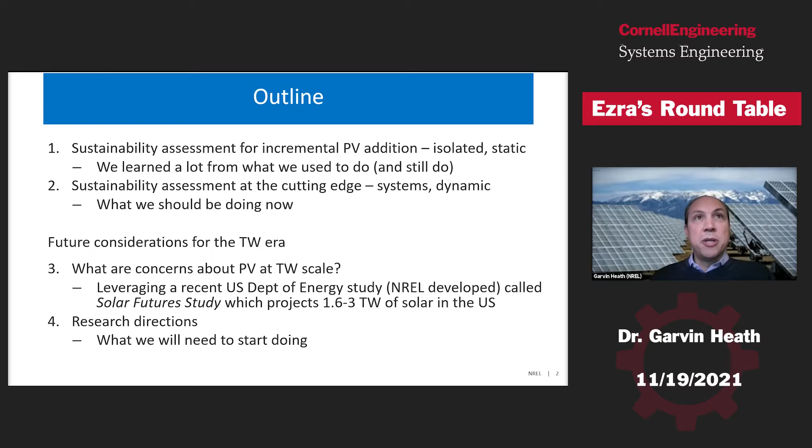But PV is going to expand, and I'm going to show you some highlights from a very recent study that was published by the Department of Energy, but that NREL really led the development of. It's called the Solar Futures Study. And it starts to consider PV at this multi-terawatt scale. And we then can ask other questions, or we should be concerned about some other questions. And we have some early answers to some of those things, but of course they need further study. And then finally, I'll end on some future research directions, what we should be starting to do now so that we can get ahead of some of these questions and answer them.

That was then featured in the IPCC Special Report on Renewables, and became the central focus of a special issue of the Journal of Industrial Ecology and has since been published elsewhere. But we assessed all of these different electricity generation technologies. We systematically reviewed the literature. We have reviewed to date well over 3,000 published life cycle assessments to come to this kind of figure.

And it clearly shows that on this life cycle greenhouse gas emissions, gram CO2 equivalent per kilowatt hour basis, again, sort of that incremental addition of a kilowatt hour, those electricity generation technologies that are powered by renewables, photovoltaics being one of them, have characteristic, so central tendency, life cycle GHG emissions at 50 grams CO2 equivalent or lower. Nuclear is also in that same camp, at least by these published life cycle assessments.

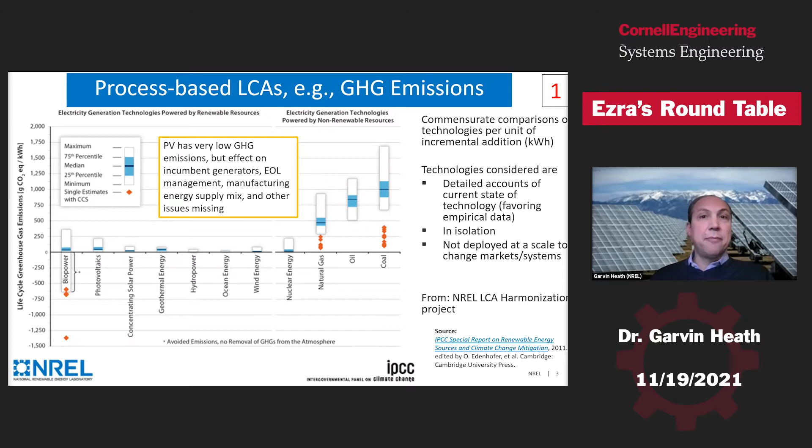End of life management, that's EOL, is typically not considered in these studies. It hadn't been to date. The energy supply mix, and as that changes, is not being considered in these. So there are many separate individual issues that are missing. Greenhouse gas emissions isn't the only thing that process-based life cycle assessments have considered. We also have considered water consumption, certainly a growing interest in the availability of water.

And on a life cycle basis, it does miss the accounting for when and where water is available, because in life cycle assessments, you aggregate over time and space. So it gives you one measure of that total water demand, but really to better understand and situate this water consumption, you need to also understand where and when. So that's another deficiency of this process-based approach. But you can see here that photovoltaics is very small in comparison to many of these other technologies.

We've divided the water use by the phase. So building the power plant, the construction, is almost all of where water is used for photovoltaics, so in the manufacturing phase, as opposed to its operation and, for those thermal plants, the fuel cycle. And you can see that by far the dominant water use for electricity generation technologies is in that operations phase, and that's because thermal plants require cooling. And cooling traditionally has used water, evaporated that water, and that counts as consumption.

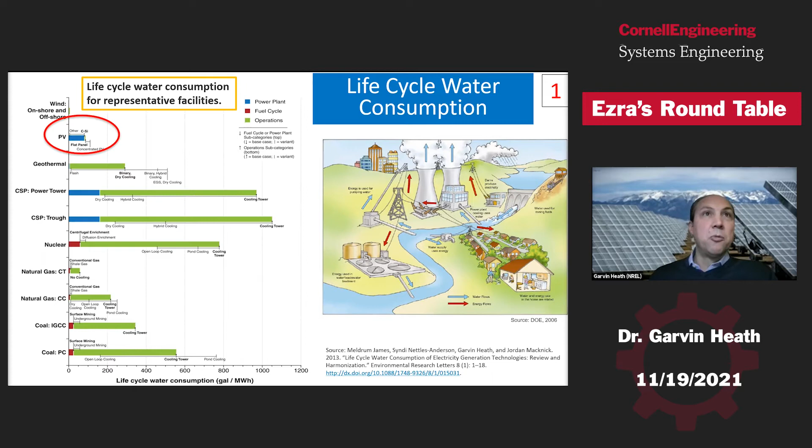So even renewable technologies that are thermal-based, geothermal and concentrating solar power, will have high water use when they use water for cooling. And so probably the best way to characterize technologies for water consumption is thermal and non-thermal, rather than renewable and non-renewable. Land use is emerging as an important issue, especially with the scale up of systems. Again, on a per unit basis, here a megawatt hour per year added.

Now, this can be compared to, and often has not been properly compared to, our incumbent energy technologies. So natural gas, coal, nuclear, et cetera. And this is a favorite point of comparison, incommensurately, improperly I would say, for those who make comparisons to nuclear or fossil fuels when they don't account for the area required for the fuel cycle. So where are those fuels provided, how much area is required in that provision of fuels, and also the transportation of those fuels to where they're used. Often it's only compared for the power plant itself, which I would say is not the fair comparison.

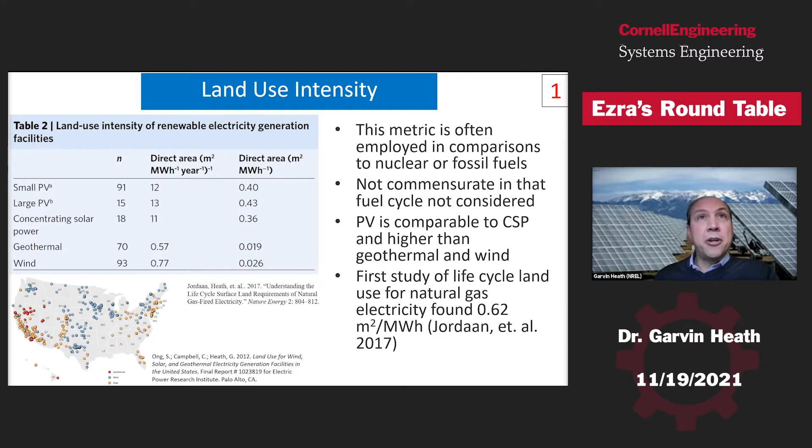Now we're at number 2 in my outline. So now we're considering advancements in our assessment of these environmental impacts of photovoltaics, and we're getting into more dynamic considerations. This was a study I was involved with, which was I think early in the evolution of these methods, where they account for a changing background energy system. So a projection of photovoltaics going out to 2030 at the time, or 2050 now, should also account for the fact that if you are adding more photovoltaics to the grid, then your electricity provision and the carbon intensity, for instance, or water intensity or other metrics of the grid is changing over time.

And so the next generation of photovoltaics being manufactured draws upon a lower carbon intensive or maybe lower water intensive grid. And so by evolving that background and also evolving the technology, the design of the technology. So for instance, for photovoltaics, we know that we've seen a large decrease in the thickness of the silicon wafer, or a large decrease in the amount of silver used per PV module. We've also seen a great increase in efficiency of these modules. All of these are technology evolutions that one can attempt to account for within these life cycle assessments so that they're dynamic and consider the changes over time. So this study focused on that.

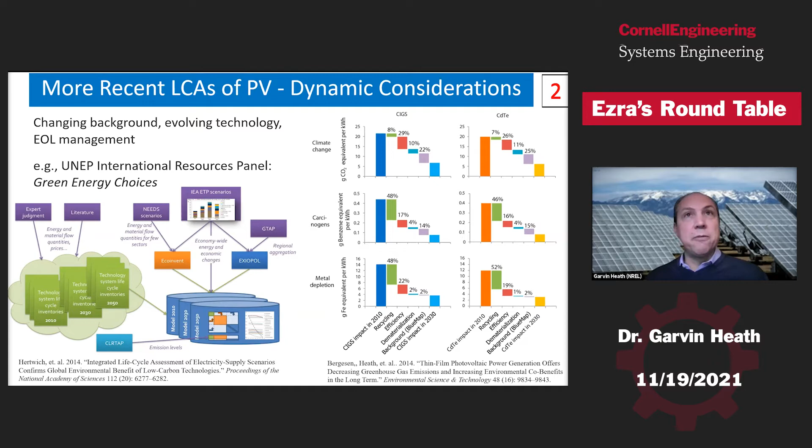PV being considered as part of a system: many, and probably even most at this point, PV systems on utility scale are being proposed with battery storage alongside these days in the US. Also, that's certainly very much being considered in residential markets. So we've done one study, and there's a small set of studies that have done something similar, looking at PV plus battery storage. Now we're considering this system deployment where PV is not considered alone, but as part of the change in the energy provision system, often co-located, sometimes not, but paired together.

And of course, we know that when you have photovoltaic electricity that's in excess of what is demanded by the system at a period of time, if you don't store it, then you're wasting that energy. If you can store it, then you're able to transfer that energy from one time period to another, where it can still provide that same decarbonization potential, et cetera. So this study looked at some different size systems for a residential PV plus battery storage system. This case was analyzed in Switzerland by colleagues of mine under the Photovoltaic Power Systems IEA banner.

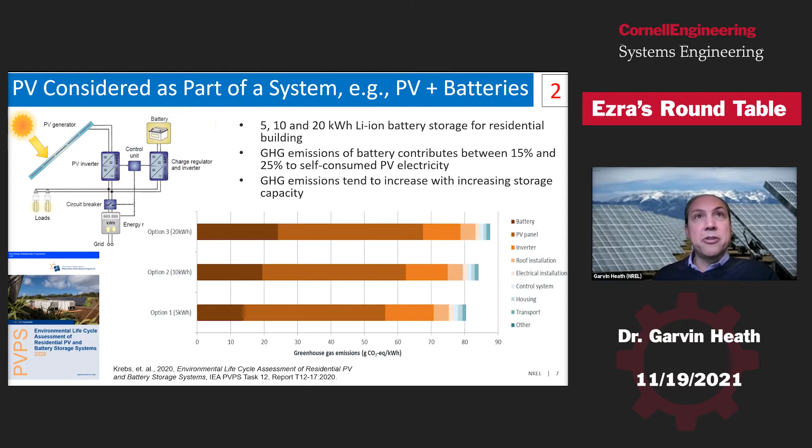So now we're moving to part 3 of the presentation, and what are some concerns about photovoltaics at terawatt scale? So now if we've progressed to looking at these increments of kilowatt hours added at a time, but now we're looking at these larger scale impacts, it raises a whole host of other questions.

How much land could PV require? What effect could PV have on human health when deployed at these scales? What could be the material demands of terawatt scale photovoltaics? This one's getting a lot of attention, especially with regard to supply chain concerns that exist today. What are the end of life implications? So if we're adding this much PV, do we have systems that can address PV at end of life?

Hopefully with circular economy focused efforts, but eventually these systems do reach end of life where we have to make choices, and especially in the US where there's no mandates like Europe has. There's already a lot of landfilling going on with these photovoltaics that have reached end of life today. What effect could PV have on ecosystems and species, which of course relates to how much land, but then more specifically about where they're located and how, of course, we can mitigate any potential negative impacts.

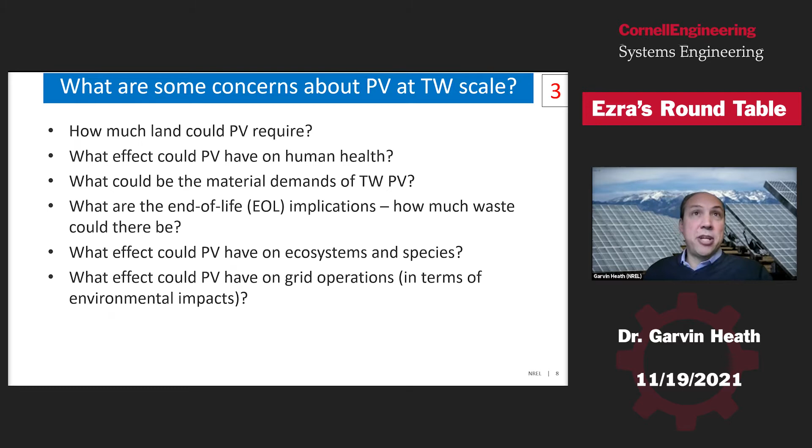And then one additional question, and of course this list could go on, what effect could PV have on grid operations? And that's especially in terms of the environmental impacts. So embedding PV, not just with the other systems that they're installed with, like batteries, but within the whole network, the whole grid, and what effect it can have on these incumbent generators and the grid operations as a whole.

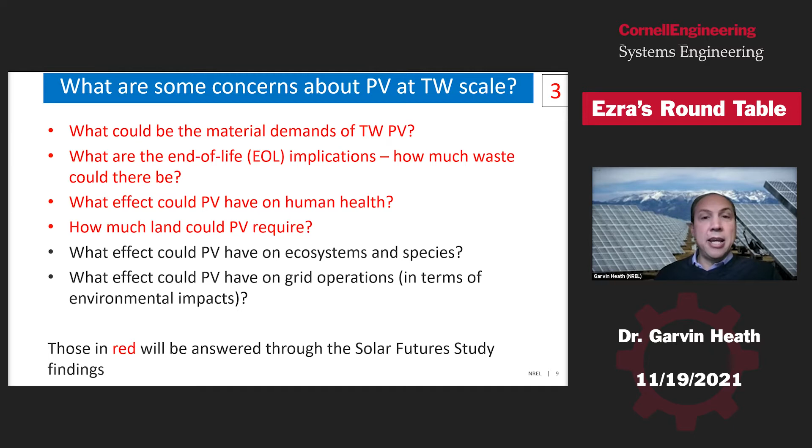For these, the questions that I'm highlighting in red, I'll be able to show some answers that we've come to quite recently, published in September, this Solar Futures study that I mentioned at the beginning, that the Department of Energy published, but NREL did most of the research for. So we'll get to look at the answer to these questions in the context of that published study and the scales that they in particular evaluated.

So to that end, I'm going to switch slide formats and branding, you'll see. This comes from an overview presentation that the Department of Energy put together and that they and NREL colleagues have been presenting, just to give you an overview of the study, to understand a little bit about it, to then be able to interpret what the results are.

So the purpose of this study, it really fits in a series of studies that Department of Energy's Solar Energy Technologies Office has done roughly every 5 years. And the first one was the Solar Vision study. And from that, they established their SunShot initiative, which was trying to reduce the cost of PV electricity down to $1 a watt. That was their goal. And if some of you have been following the progress of especially cost declines in PV, you'll know that on utility scale systems, we've actually hit that. And it's pretty amazing, the kind of cost reductions that we've achieved over time.

So because cost reductions have come faster than most really ever expected, and the learning curves have been tremendous and been robust and consistent, they haven't died off yet. The Department of Energy continues to want to re-up their goals and visions every 5 years to keep up with the technology. So this one fits in the series.

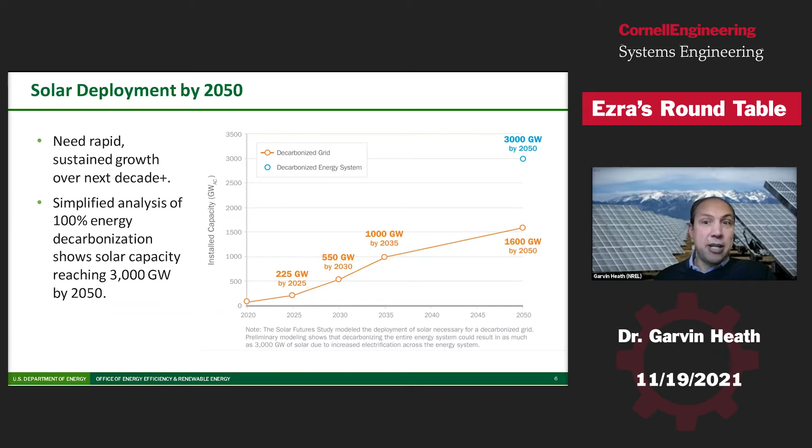So that's going to be an incredible challenge to get there, to meet these deployment levels. They're not exactly deployment goals; these are projections, but this is sort of now established as the target for this office and really the whole administration.

So going then to the questions that I posed as ones that arise when one thinks about sustainability aspects of getting to that kind of deployment scale of multi-terawatts: what are the material demands? And how do those material demands relate to available supply and global markets? So this is a figure from the Solar Futures study, and for some reason silver comes out quite pale, but that's how it was published.

And you can see with the not filled in circles and triangles, that's the US demands. So just the US for the decarbonization scenario, that is just the electric grid scenario. The decarbonization plus electrification includes the other sectors. Silver, silicon, and aluminum are within less than a handful of percent of total global production of those materials.

So the U.S. alone, it would seem, is not going to throw out of balance the global supply, and that's 2020 supply. And of course, supply is dynamic and depends on demand, depends on the economics of that. We know these are cyclical industries. But it would not seem that U.S. demand alone is going to change that global outlook.

However, if you consider global decarbonization, so if you refer to some global projections for PV growth, then that picture changes a little bit. And in particular for silver, if you look at the global decarbonization scenarios, again, across sectors, not just the electric sector, now we're talking about 40% of 2020 production of silver being consumed by just one commodity, which is photovoltaics.

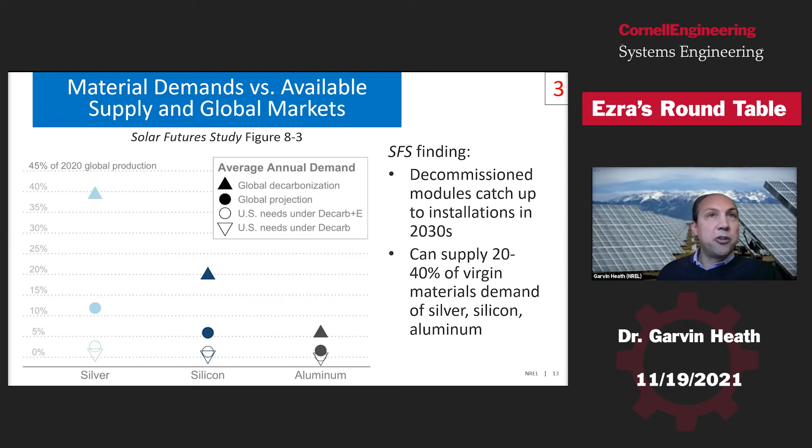Now, the flip side of the material demand is, of course, the end-of-life materials. We tend to call it waste, but we shouldn't, because if we do want to recover these materials, we should be considering it as having value, and try to use words that reflect that. But this is a Department of Energy slide, and it's really hard to find a single term yet to get away from that terminology. Anyway, I want to present that thinking to you.

Using that same PV-ICE model that NREL's developed, we looked at the end-of-life material mass. This is the total sum of all materials in modules under a reference scenario, and then the two decarbonization scenarios. These are the flows. You can see the distinction in the end of life by 2050; they start to depart from the curves at about 2040.

But with typical useful lives of 30 years, and actually getting extensions on that, it takes a long time for those modules to come offline and have their embodied materials potentially available to recover and reuse. But as I showed in the previous slide, this is a strategy we can use to try to mitigate some of the demand and supply and incumbent supply chain issues. But we're not really prepared now, and we need to do more to prepare. So what are some of the things that, at least in this study, have been recommended?

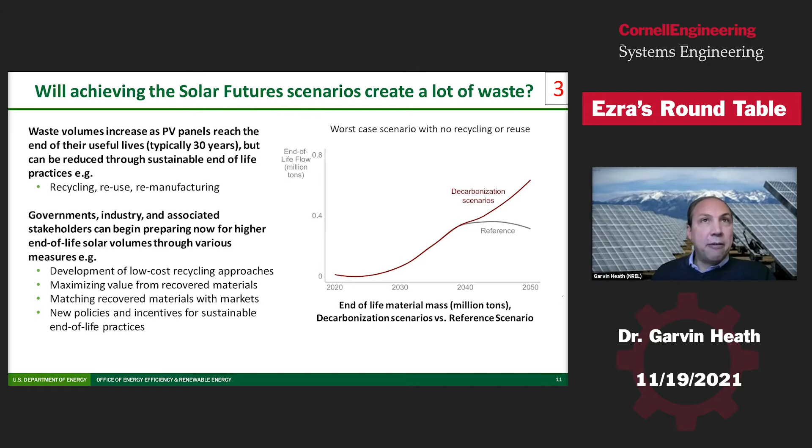In addition, one aspect of health: I asked the question, what would be the impacts on human health? So within the Solar Futures study, we looked at the avoided emissions within both the power sector and also the transportation sector from displacement of fossil fuel combustion if solar is added. So in the case of transportation, if we electrify part of a transportation fleet, that's then avoiding the emissions from gasoline or diesel fueling those vehicles currently. And solar could then, of course, provide part of that electricity.

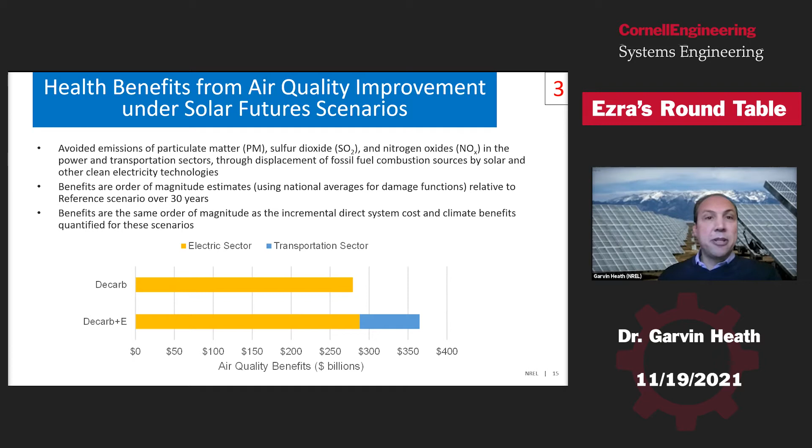Carrying on about PV and human health, there were a series of three reports that this International Energy Agency group that I lead has published over a series of years. These are risk assessment documents. So again, they're incremental in terms of kilowatt hours of PV or small scale systems, not large scale analyses. But they use methods recommended by the EPA and the National Research Council, and then apply them specifically to the case of PV. So in some ways, these are really method proof documents rather than complete human health risk assessments.

One aspect of that is that we only chose a single highest prioritized material in terms of toxicity to assess for each of these scenarios rather than the full set of materials. So they can't be considered a complete human health risk assessment. But we looked at cancer and non-cancer risks, and for PV that's exposed to fire, that can lead to air emissions, and the air emissions can be inhaled, but particles can also get onto the ground and into the groundwater. So all these different exposure routes are considered.

The second one being PV that's left in the field with broken glass. So if rainwater gets in through the broken glass onto the semiconductor layer, it can pull off some of the metals that then get dropped onto the surface of the earth, go into groundwater, go onto the land where they could then be stirred up by winds and cause inhalation exposure. Those are the pathways assessed in the middle one.

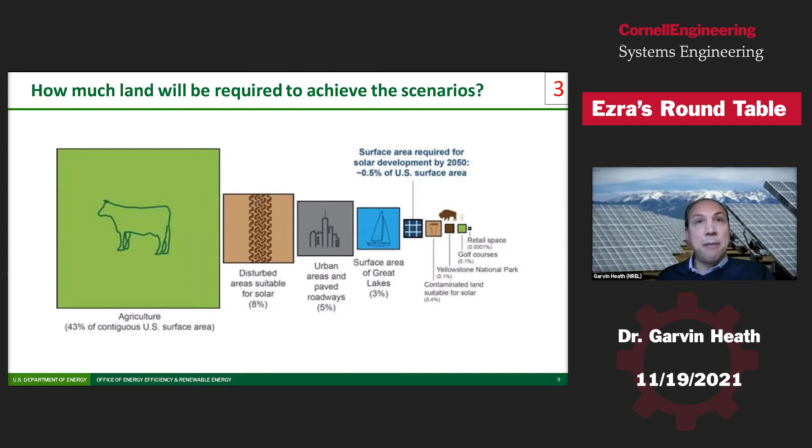And of course, there's preference for the cheapest land and flat land and land that's as close as possible to transmission. So not all of these contaminated or disturbed lands are going to meet the criteria that is ideal for the first step deployment. But there's a lot of land available, and as we go through those lands, you're going to have to move to others, and there's plenty of contaminated and disturbed land available, which would then present less of that land use conflict.

But there's also, of course, effects on species. This is a nice study that I was not part of, but Rebecca Hernandez from University of California, Davis has done several years ago, outlining all the potential effects that solar could have on the environment, and in particular, focusing on ecosystems and lands.

I think that clearly there are many different effects, but we also have to remind ourselves that we do have incumbent energy systems and what effect do they have, including, of course, their fuel supply chains, and that there's opportunity for mitigation. And that's something that we spend a lot of time on in the Solar Futures chapter, is on how we can mitigate some of these effects on lands by, in particular, choosing lands that don't have the same conflicts with ecosystems, like contaminated or disturbed lands.

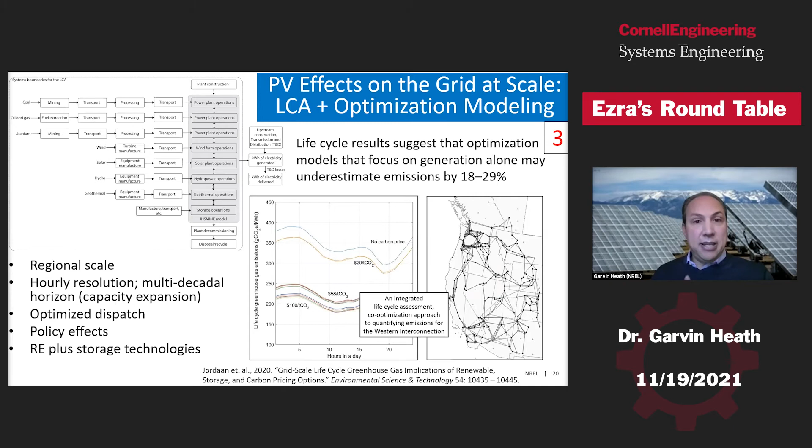Life cycle results suggest that optimization models that focus on generation alone may underestimate emissions. So there is some increment of additional emissions by adding solar and other renewables, in this case in large capacity over this large expanse, in terms of its effect on the incumbent generators and the outlook going forward in the future that should be taken into account.

Okay, now I'm getting into my last section about research directions. So these are just some amongst, I think, a much longer list, but some that I thought I could highlight. So purchase sustainable solar. This is an opportunity that we have because some solar provides an opportunity to enhance the sustainability benefits. I will be very firm in my assertion that all solar provides, for instance, decarbonization benefits. We should not be slowing down installment of solar for trying to choose one or the other, but there are opportunities to purchase more sustainable ones.

And so within the EPEAT program, which is an electronics sustainability grading program that, for instance, the federal acquisition regulations require the use of for federal government purchasing, and many states and organizations have adopted as well, there are different levels of sustainability performance that are graded. And for solar, I was part of a team that developed a sustainability leadership standard for PV. It actually was focused on modules first and now expanded to inverters.

So there exists a consensus-based international standard, the American National Standards Institute process was used here, for classifying or grading solar for its sustainability performance. And we have an opportunity with purchasing, especially large purchasing going forward, to try to pull those from the market and expand the market for sustainable solar.

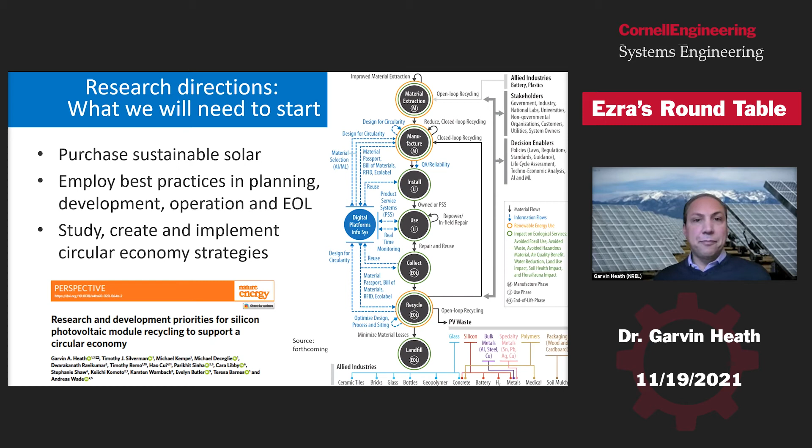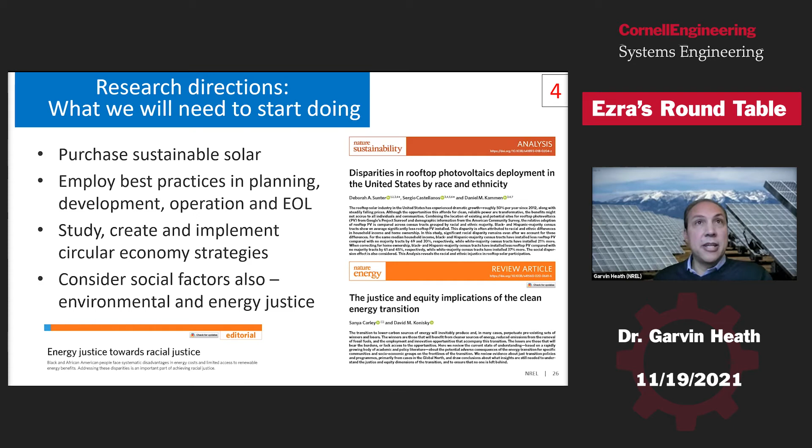And finally, I come to environmental and energy justice. Certainly, this is a big priority of the Biden administration, something that has been studied more and more recently about solar, in particular about deployment of solar, but is something that still needs more attention. How can we ensure that there's an equitable distribution of these renewable energy and also energy efficiency technologies to all groups that want to participate in decarbonization and the energy transition, but heretofore have not had equal opportunity to do so?

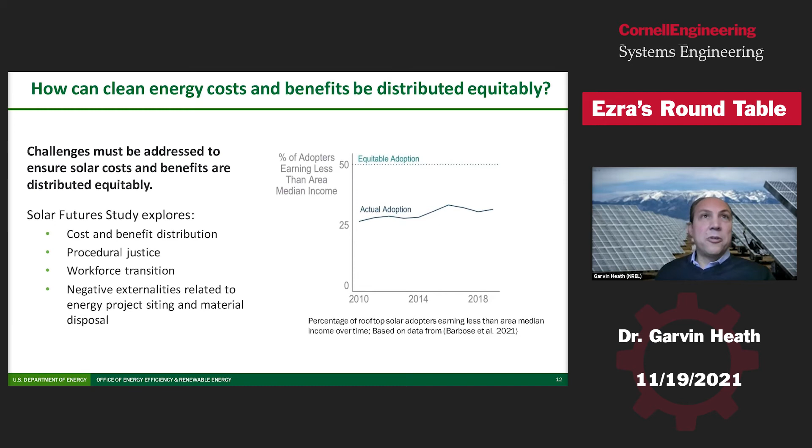So the Solar Futures Study actually did look at this, but in an honest acknowledgement, understands that even under these projections that we have right now, there's still not equitable adoption. So maybe some improvement you can see between 2010 and 2018, but not much. And so a long way to go to try to get to more equitable adoption.

And with that, with fewer minutes than I'd hoped, those are some thoughts on PV at a terawatt scale and some sustainability impacts, but also opportunities. And I think some thoughts also about the methods that we can use as a research community to try to address some of these.

Thank you so much. This is very enlightening and very comprehensive. I guess the floor is now open for questions. I see Mark unmuted himself already. Maybe Mark, are you ready to ask a question? Oh, I just want to say hi to Gavin because I need to go for another meeting. Right. But I think this is a really comprehensive review of what's going on here. I think I have just one quick question.

When I see solar as part of the circular economy, I think you mentioned a rating system for the panel, right? I suppose for the hardware. But if you think of solar as a system, it's more than just a panel. So there are many other issues, right? So are there any developments in more comprehensive ratings of solar development rather than just the panel itself?

Yeah. As far as circular economy is concerned, Max, most people consider every other major component of an installed solar system to be much easier to address at end of life than the panel itself. And I think there are some obvious reasons for that. The panel is designed for 30 years of deployment in any environment in the world, and it's supposed to last and perform to warranted performance for that entire time. A product built like that is going to be hard to take apart and hard to get at those